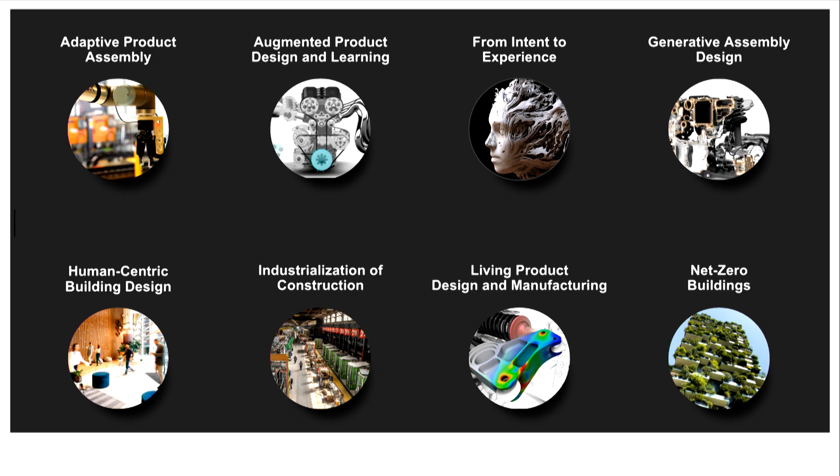Autodesk is a 3D design company here in the Bay Area, and today I'm representing Autodesk Research. This is a really awesome organization. We have a ton of different research themes across our industries. A lot of you might know us for architecture, engineering, and construction, manufacturing, media, and entertainment. But if it's news to you today, we also actually have a lot of robotics research that has gone on for the past 10 years.

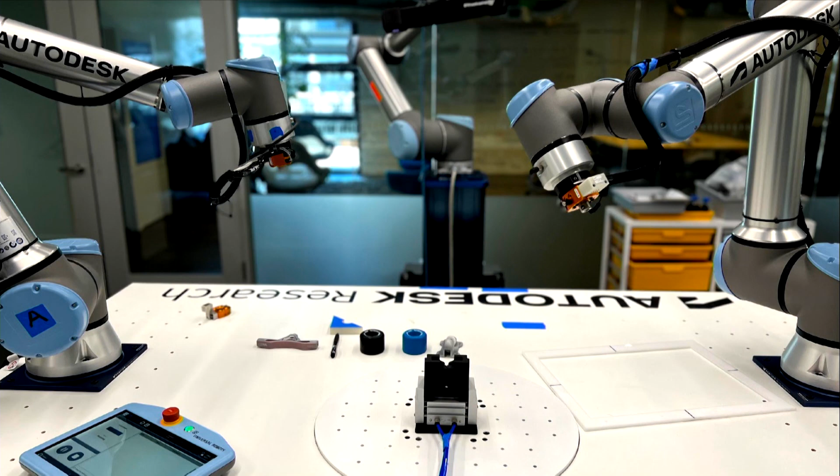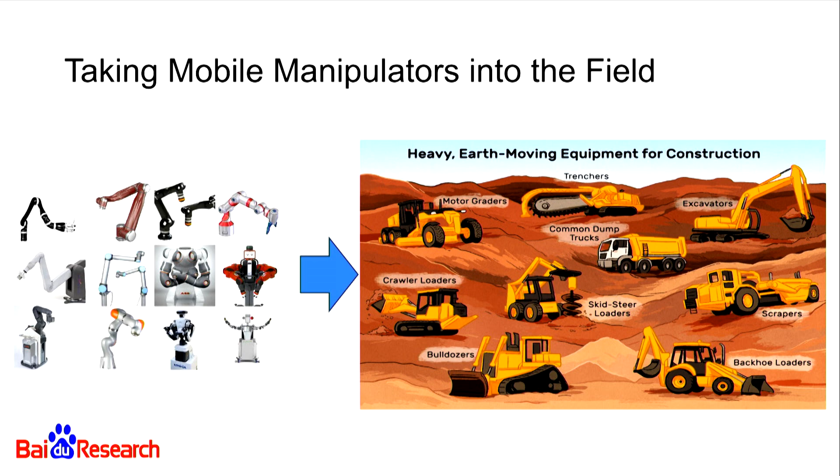We work on construction machinery automation, such as excavators, which can be thought of as mobile manipulators but working in the field. Our research motivation is that operating an excavator is very challenging because the worker needs to work in a very harsh environment, and there's also a shortage of skilled operators.

Towards this goal, we have developed an autonomous excavator system, AES, for construction earth moving, collaborating with top construction companies. This video highlights the performance of our AES system, which can perform multiple construction moving tasks, such as truck loading, autonomous truck loading. As you can see, there's no operator inside the cabin for this excavator. Other tasks include navigation in complex terrains and trenching of the terrain.

Our system incorporates perception, planning, and control. There's a lot of research challenges behind construction robotics because robots need to work in unstructured environments, and we are looking for collaboration. Thank you.

Using intelligent robotic systems to automate everything from the inside of the warehouse to the consumer's front door. Today we have three next-generation robotic fulfillment centers powered by fleets of intelligent mobile manipulator robots that reliably pick, pack, and handle thousands of customer orders every day.

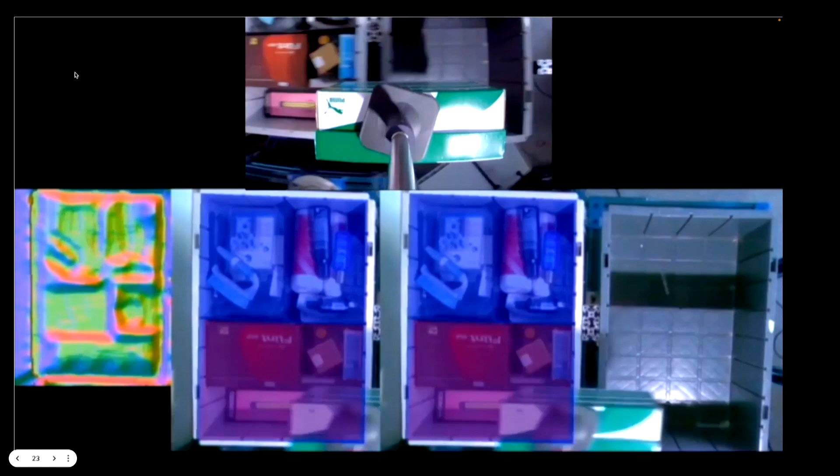Our RL policy learns how to most effectively coordinate dozens or hundreds of robots to fulfill thousands of complex orders by efficiently navigating through the warehouse and collaborating with other robots to store and retrieve inventory and pick, pack, and sort orders. On the vision side, in this video, we show our robot's ability to handle a diverse set of products, everything from footwear to apparel, electronics, cosmetics, brushes, loofahs, etc.

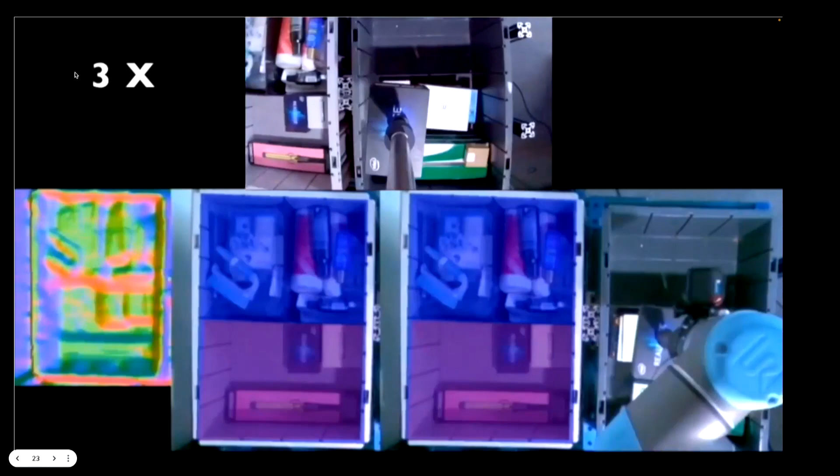What we're showing in this video is our robot's ability to determine regions on each of the objects where it can place its gripper to reliably pick the object up. We're also segmenting and separating out the different objects in the scene to determine material properties about each one, like whether it's big, small, rigid, compliant, or porous like a sponge. We use all of that information to determine how the robot should handle the item and what type of gripper it should use.

So you can also see we're densely packing and playing this game of 3D Tetris in real time. There are three things that make our picking system reliable across millions of different objects.

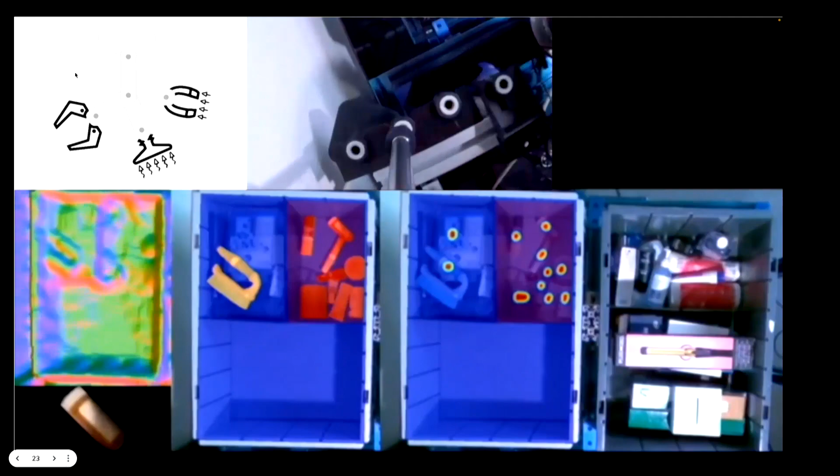The first is the Nimble brain, the AI system we've developed in-house. The second is the Swiss Army knife gripper, our robot's ability to swap out different types of tools and grippers to reliably handle many different objects. The final piece is the teleoperator in the loop, which helps the robot if it ever gets stuck, and is also used as a means of collecting more training data for behavioral cloning.

Quickly, I'll highlight Nimble's iconic AI board of directors: Fei-Fei Li, Marc Raibert, founder of Boston Dynamics, and Sebastian Thrun, founder of Google X and Waymo.

Good morning. We propose automatic waypoint extraction, or AWE, to scale imitation learning to long horizon tasks. AWE is a simple plug-and-play module that automatically breaks demonstration trajectories into waypoints without human supervision. Then you train your policy to predict the next waypoint instead of the next immediate action. AWE decreases policy horizon by up to 10x, and thus reduces compounding errors.

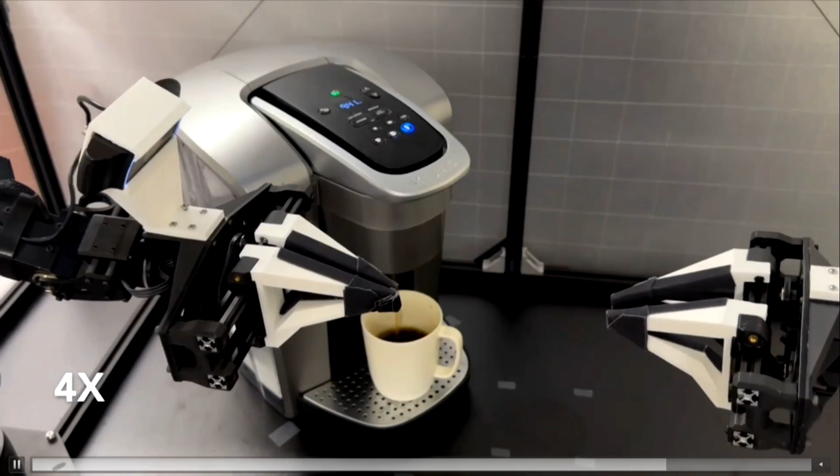ALL can be combined with state-of-the-art imitation learning methods, such as ACT and diffusion policy. It consistently improves the performance and data efficiency on previous benchmarked and real robot tasks. Come chat with us if you're interested in long-horizon decision-making. Thank you.

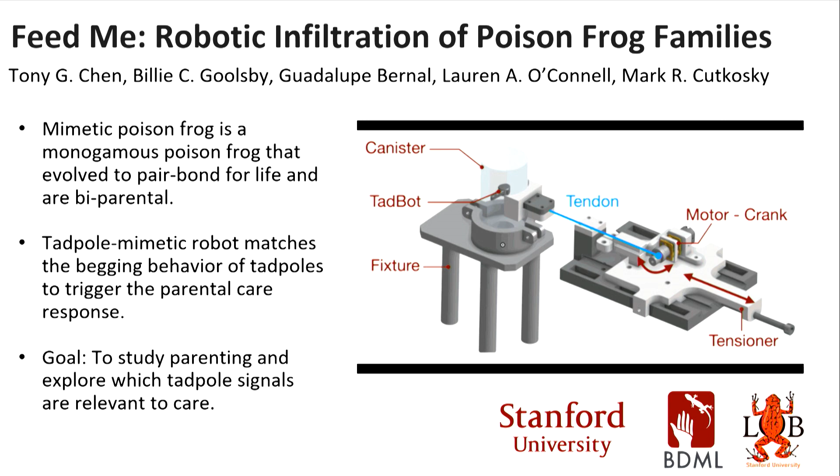The key idea is that we would like to use commercial drones, which are widely available, cheap and simple systems, as thrust modules to attach to a generic object to transport it and fly it around. The insight is that the attachment locations around the objects are very important synthesis parameters that we can leverage.

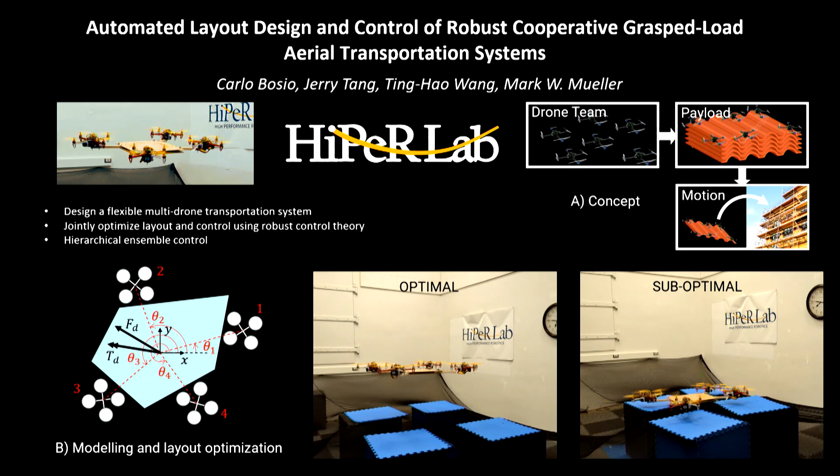Hi everyone, I'm Sophie Leanza, and my project involves a soft robotic arm that can mimic the multimodal deformations of elephant trunks. Elephant trunks can achieve a wide range of different deformations due to the contraction of their differently oriented muscle fibers, such as longitudinal or helically arranged muscles. We're using an artificial muscle that contracts upon heating, called liquid crystal elastomer, and we achieve multimodal deformations by heating these materials through a simplified, rationally designed muscle arrangement.

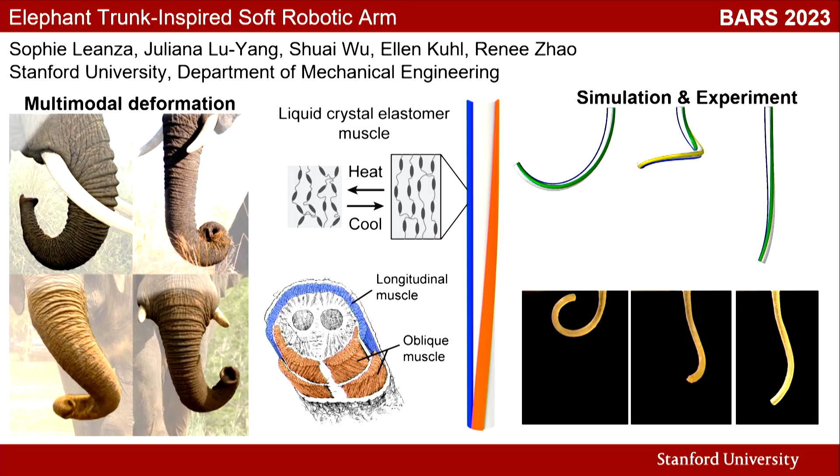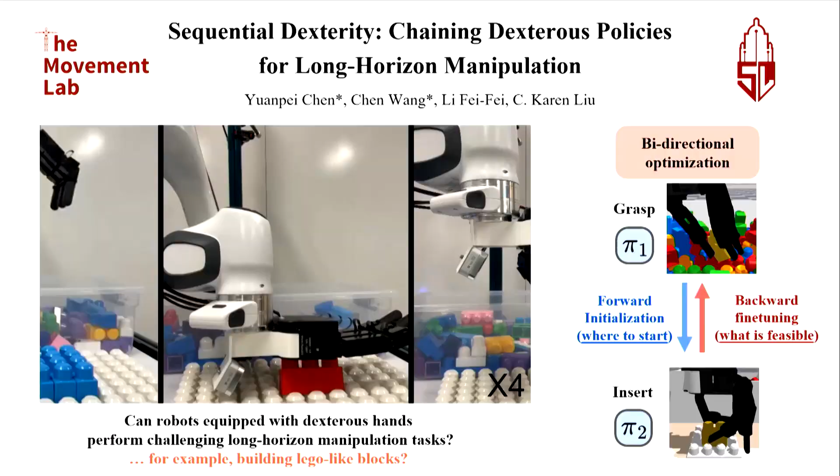Hey everyone. How can we enable a robot equipped with a dexterous hand to perform challenging long horizon manipulation tasks, for example building a structure from a pile of mega blocks? In this work, we present Sequential Dexterity, a general system based on deep reinforcement learning that chains multiple dexterous policies to achieve a long horizon task goal.

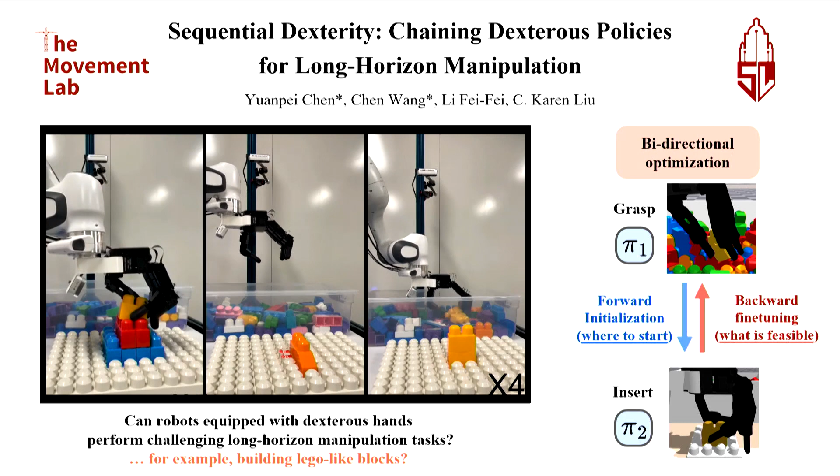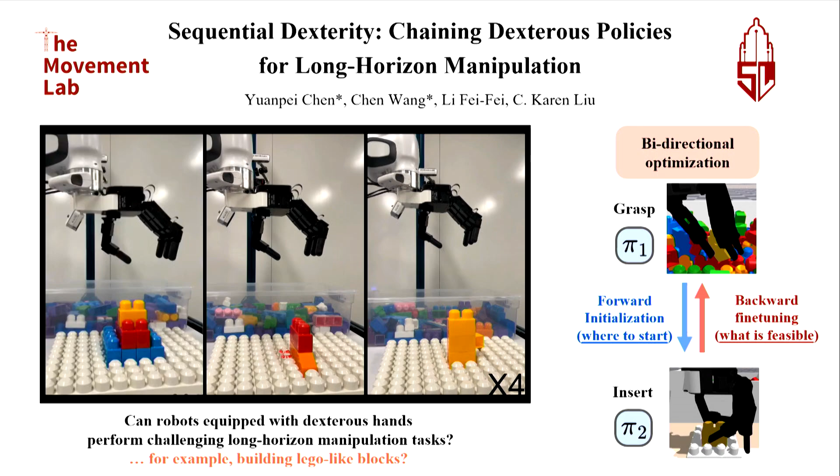The core of our system is a bidirectional optimization framework, which progressively fine-tunes the sub-policies to enhance the chaining success rate. The key is to guarantee that the end-state distribution of the previous skill is feasible for the next skill to start with. For more details, feel free to check out our poster and our website. Thanks.

Hello, I'm Claire, and our project AO-Grasp, Articulated Object Grasp Generation, focuses on the first crucial but challenging step of interacting with any articulated object: determining how a robot should grasp it to enable downstream interaction. AO-Grasp predicts stable and actionable grasps on objects like cabinets and appliances, given only partial point clouds. We train it on a new synthetic dataset of grasps on articulated objects.

Despite being trained only on this synthetic dataset, AO-Grasp proposes actionable grasps on real-world objects with varied geometries and articulation axes, in both open and closed states. Please stop by our poster to learn more. Thank you.

Hello everyone, I'm Won Kyung Do from Stanford University, advised by Monroe Kennedy. This project is about inter-finger small object manipulation using the DenseTact optical tactile sensor. The goal of this project is grasping, reorienting, and classifying small objects out of a cluttered environment using our soft optical tactile sensor input.

We successfully achieved an 88% successful grasping rate as well as successful classification results for grasping small objects out of the cluttered environment. If you want to check more details about our project, please come by our poster, and thank you.

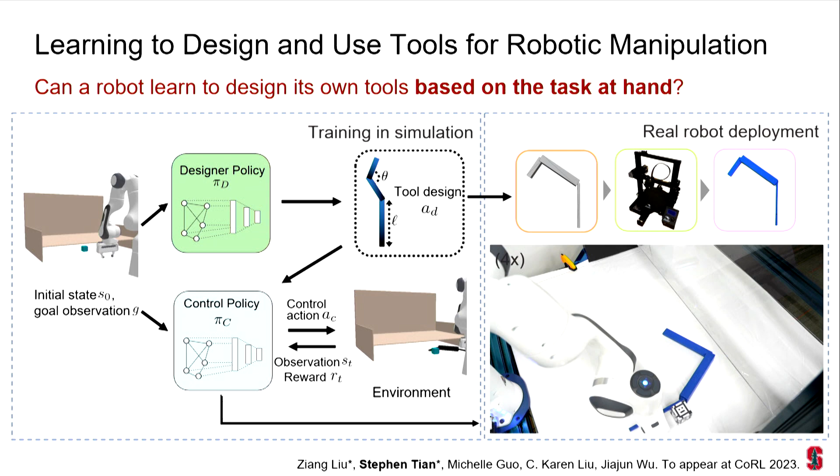It turns out to be harder than it looks, because the design of a tool and how you use it are highly interdependent. So we develop a deep RL framework for robots to jointly learn to design and use tools for manipulation, creating specialized tools based on the task initialization or goal. We develop a set of evaluation environments, a simple tool design parameterization, and evaluate our policies on real robots by creating the tools in the real world using 3D printing.

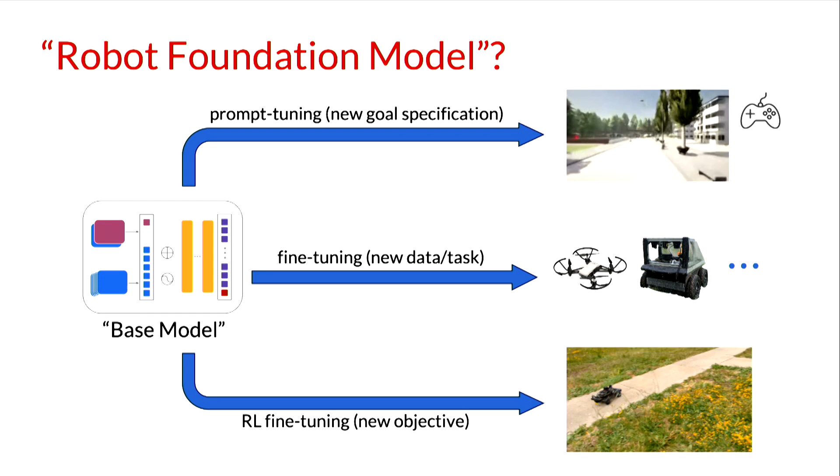To this end, we try to train a cross-robot model, which can be fine-tuned using new data for new tasks, like new robots. It can be used by prompt tuning for new goal specifications, and by fine-tuning with different objectives, like reinforcement learning. And the code is public.

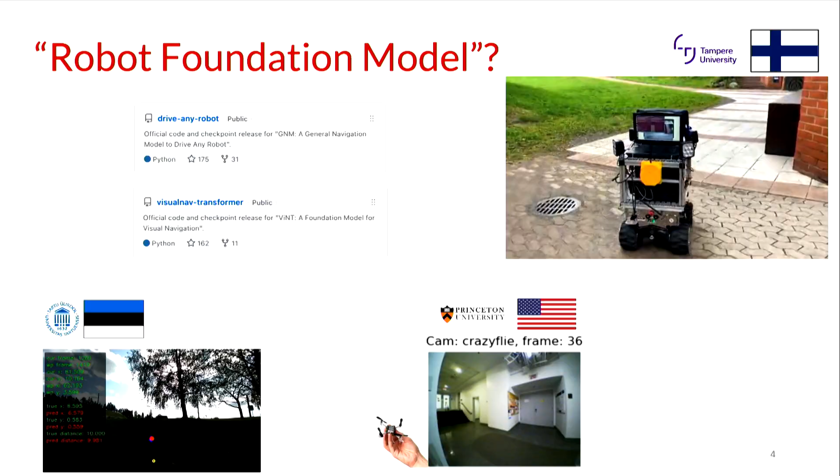Hi, I'm Yu Chen. I believe future robots will need to learn from non-expert human teachers. Therefore, it is important to harness the right kind of information from such interactions. For example, non-expert human teachers can provide noisy demonstrations that harm downstream imitation learning.

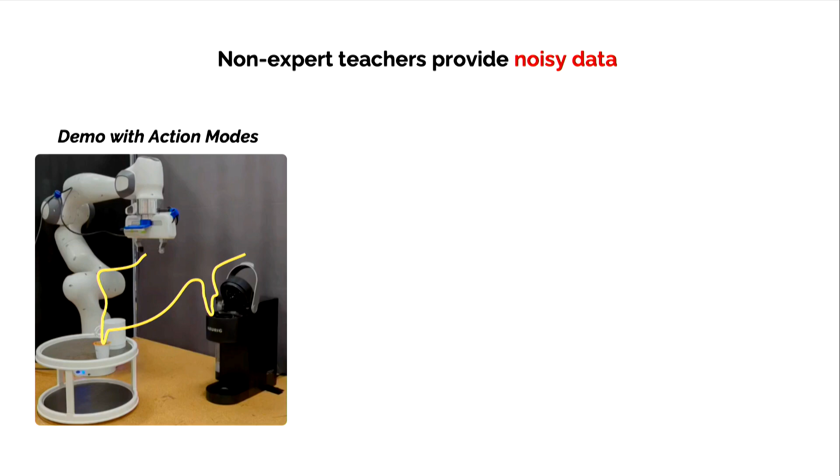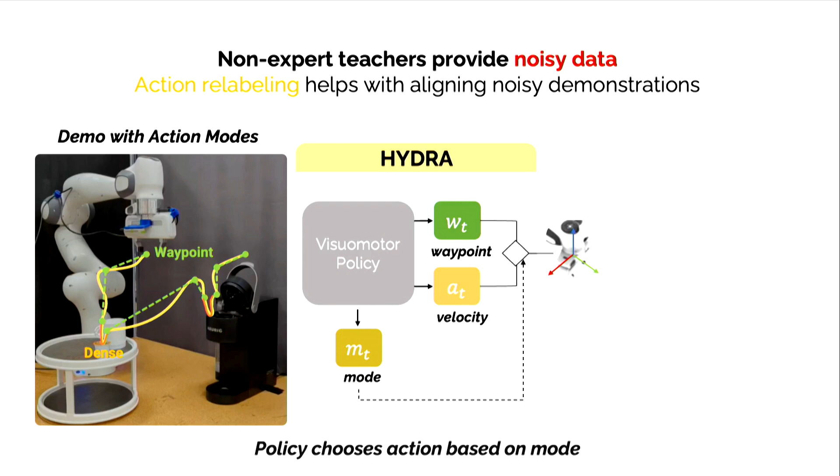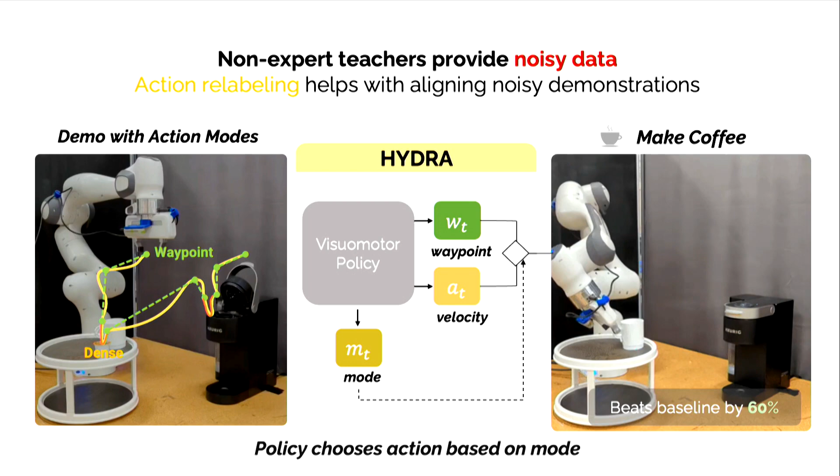In this work, we show that if we collect additional annotations of action modes, we can leverage action relabeling to train policies with hybrid action representations, so that simply doing imitation learning without any reward signals can also learn from suboptimal data. We show that our method can beat baselines by 60% at this challenging long horizon precise manipulation coffee-making task. This work will appear at CoRL next month. Thanks.

Hi, my name is Ron, and I'm a PhD student in the Autonomous Systems Lab, advised by Professor Marco Pavone at Stanford. Our goal is to build reliable autonomous systems that safely leverage learned components.

In this work, we ask: how can we avoid closed-loop failures when faced with out-of-distribution observations at deployment? Observations that are dissimilar from training data, on which learned models can behave very erratically, and that will suddenly come up during deployment.

We thought it might be very difficult to robustify a perception system to anything it can possibly encounter at deployment. At the very least, we may try to detect such examples at runtime and use such an OOD detector to trigger a safety-preserving fallback strategy. If you are interested in building robust autonomous systems, please come see me at my poster.

Hi everyone, my name is Joe. I'm advised by Mac Schwager. Today I'll be talking at the poster session about guaranteeing robot system performance using stochastic simulation rollouts.

This addresses a problem where a lot of our dynamics models these days are wrapped up in very complicated simulators where we don't have the actual equations exposed to us, which makes traditional analysis of performance very challenging. So we resort to a distribution-free statistics approach where we can certify different measures of risk and different chance constraints.

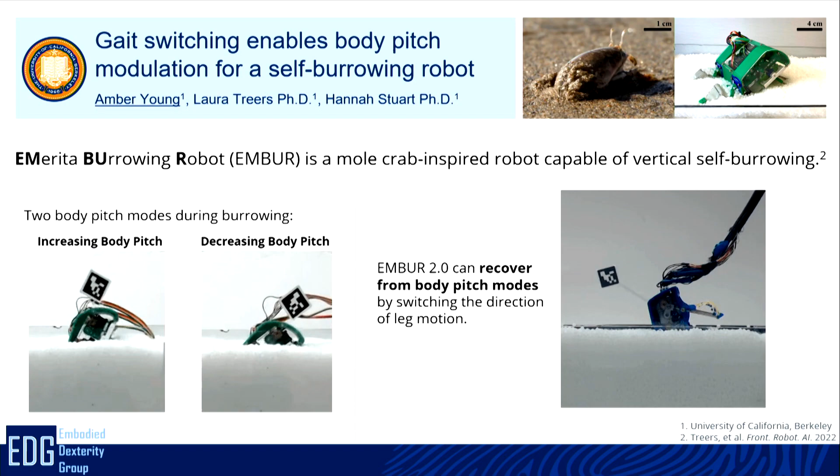Burrowing on granular media is a very challenging task for robots due to upward resistive forces from the granular media. However, it's a very easy task for the Pacific mole crab, which can burrow very fast as it's avoiding predators. My predecessor, Laura Treers, designed the EMBUR burrowing robot inspired by the Pacific mole crab, one of the first legged robots capable of vertical self-burrowing. However, we noticed there were two failure modes as it would burrow, described by its changing body pitch. So we designed a second version of the robot, EMBUR 2.0, capable of body pitch control. To learn how that happens and to meet the robots, come check out my poster. Thanks.

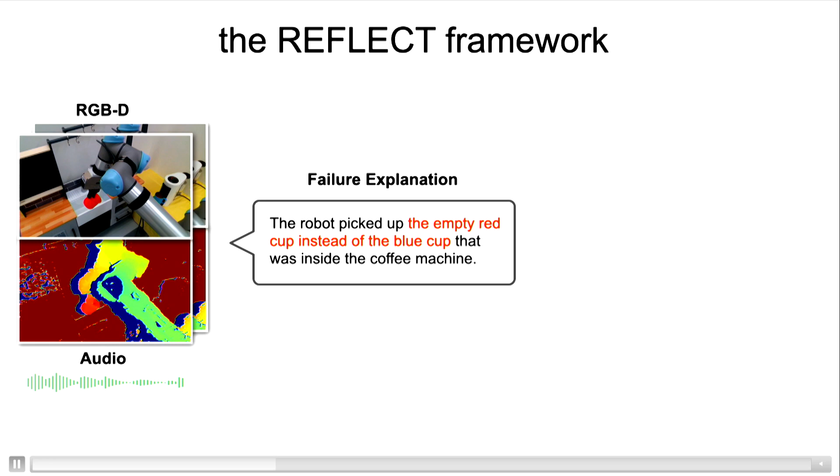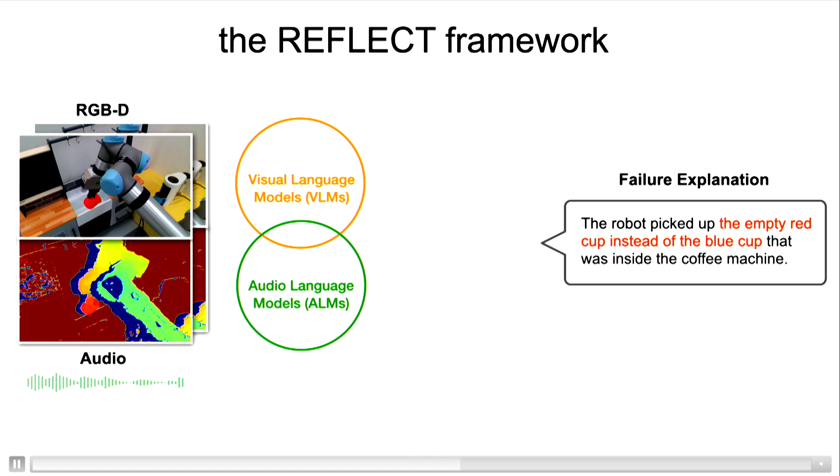We present Reflect, a general framework for both human and robot to better understand failures. The framework takes in multi-sensory observations from the robot task execution and outputs a natural language failure explanation, which either helps a human debug the failure or helps the robot generate a correction plan. Our approach uses pre-trained VLMs and ALMs to convert raw sensory data into a textual summary of the robot's past experiences, which is then used to query an LLM for failure explanations. By leveraging the common sense reasoning ability of LLMs, our framework makes no explicit assumptions on tasks or failure types. To learn more, please visit Zeyi at the poster session. Thank you.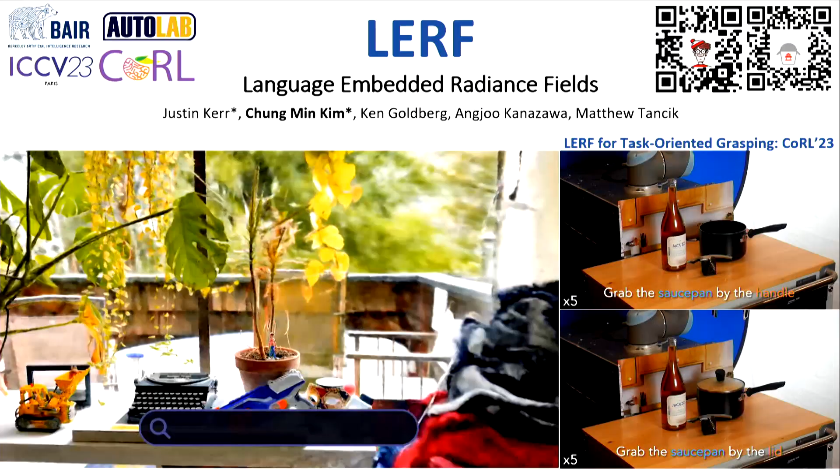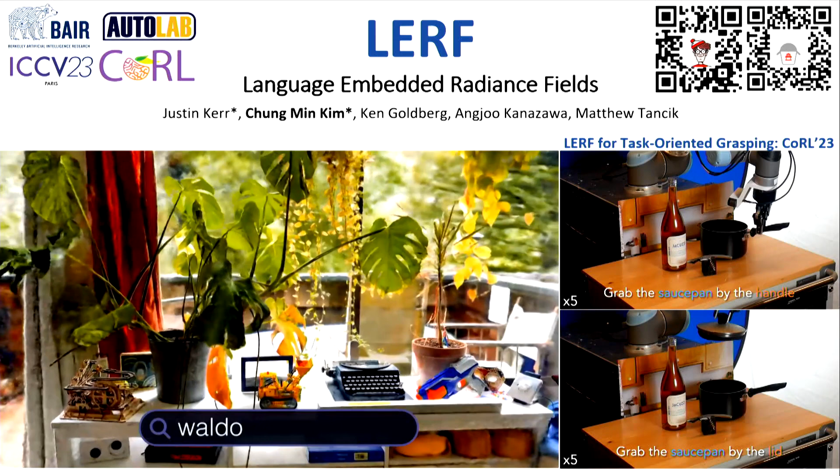Hello, I'm Chung Min from Berkeley's AutoLab, presenting LERF, Language Embedded Radiance Fields, and our follow-up paper using LERF for task-oriented grasping. LERF embeds CLIP features volumetrically into 3D, resulting in a 3D scene representation which can be queried with natural language. It has a multi-scale understanding of the world, which can be used for querying large objects as well as their parts. We leverage this property for task-oriented grasping. Given object and part queries specified by natural language, the robot queries LERF to generate semantically meaningful grasps. Please come to our posters or scan the QR code to find more. Thank you.

Hello, my name is Ahad Rauf, and my research is on smart skins for soft robots.

Traditionally, soft actuators and sensors are made on elastomeric materials like silicone, but soft manufacturing processes often have issues scaling to make large actuator and sensor arrays. My research is on auxetic and kirigami form factors for flexible printed circuit boards, embedding electrostatic layer jamming and capacitive sensing for scalable, low cost, and high resolution, localized stiffness control, and distributed sensing.

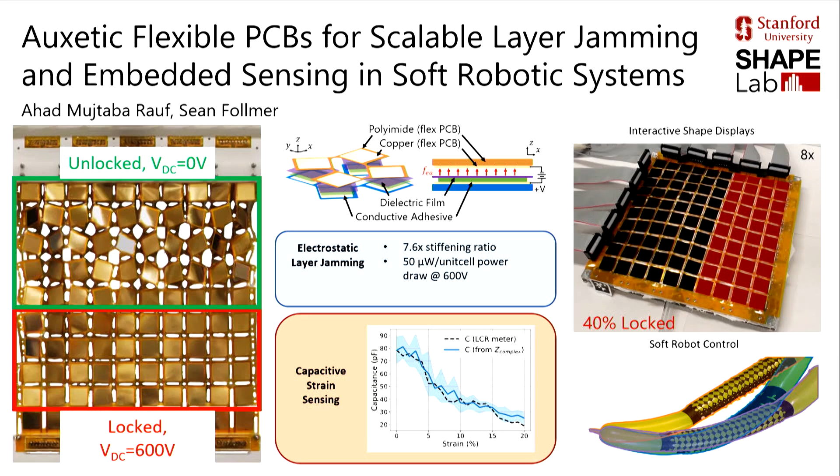I'd love to chat with you at my poster session about our applications in haptic user interfaces in soft robotics. And I also have more fidget toys. Thank you.

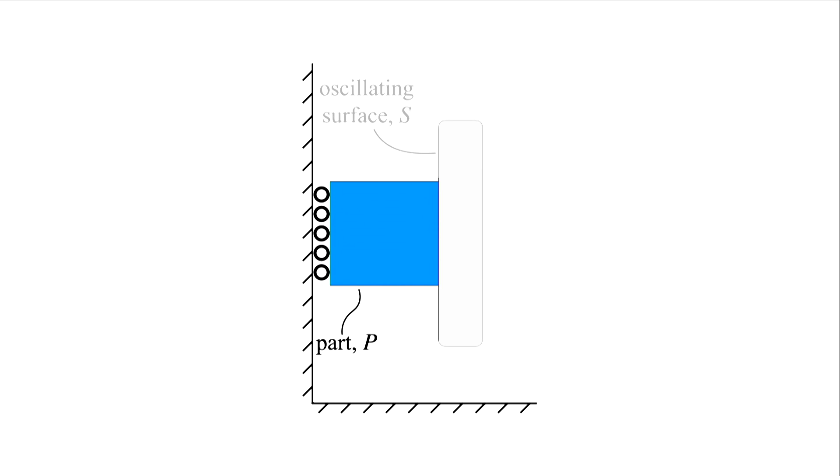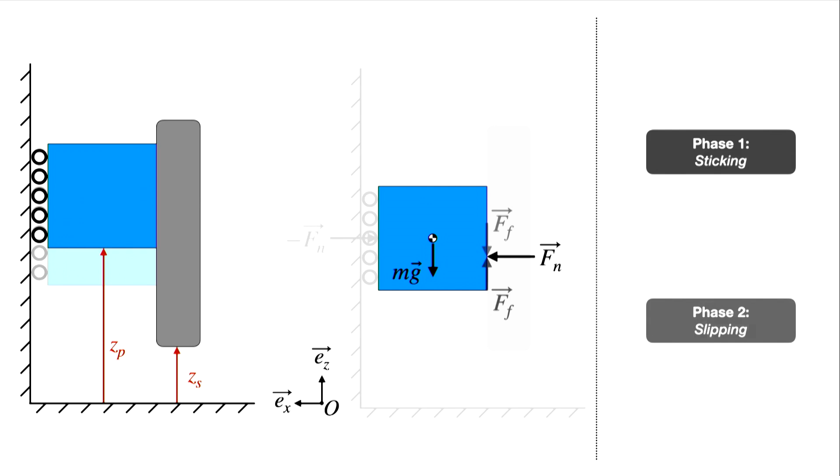Hey everyone, I'm Connor. So what we did is we took a simple vibrating surface and used that to transport parts vertically against gravity. We did that using alternating sticking and slipping phases, sticking up with the object then slipping below it, effectively catching it at a lower position. We repeated this over and over again to move that part upward.

To test this theory, we built a parallel jaw gripper that can transport a bunch of different parts with different masses, friction coefficients, and also different contact types. So we had plane contact, line contact, and point contact as well.

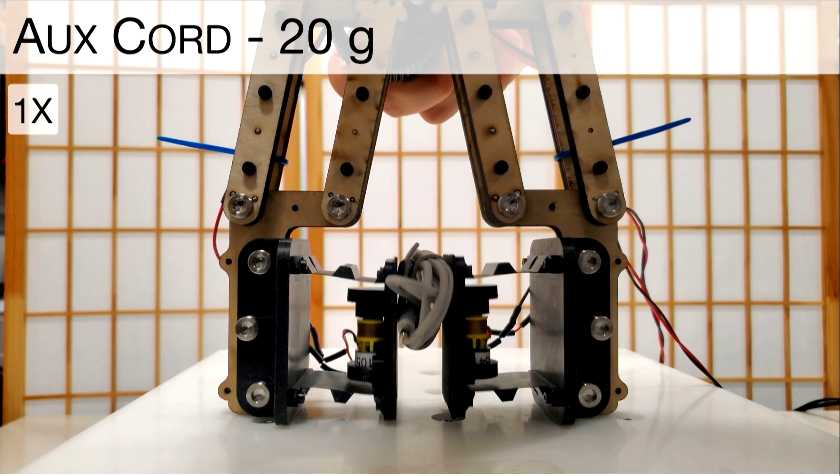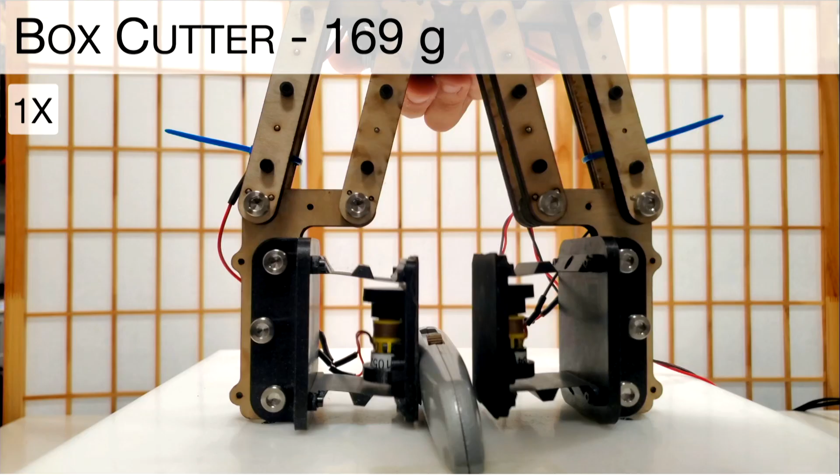To verify our dynamic model, we also built a test bed. I pointed my phone through a microscope and collected some motion tracking data, and that verified the dynamic model we were using. If you want to come learn more and play around with the device a little bit...

I didn't bring it to turn it on because it's really loud, but if you want to play around with it passively, I'll have that at my poster. Thank you.

Hello everyone, my name is Himadri Basu and I am presenting today the trajectory planning problem of a multi-agent system in space applications. The objective of a formation reconfiguration problem is to find a fuel optimal final configuration and thruster commands that allow the agents to move from one formation to the other while avoiding any collisions along the way.

The challenges are that the target assignment problem is coupled within the trajectory optimization framework, giving rise to exponential time complexity because of the mixed integer linear programming formulation. The second issue is the non-convexity of collision avoidance constraints.

We present two approaches in our work where we decouple this assignment problem from the optimization algorithm, and these two approaches differ from one another on how collision avoidance constraints are formulated. In the first approach, we find a feasible path to a fuel optimal final configuration. In the second approach, we find a feasible final configuration with optimal paths towards the terminal locations.

In our current work, we are additionally considering the presence of external obstacles and developing a reinforcement learning based maneuvering policy to avoid such obstacles. Thank you, come check out my poster.

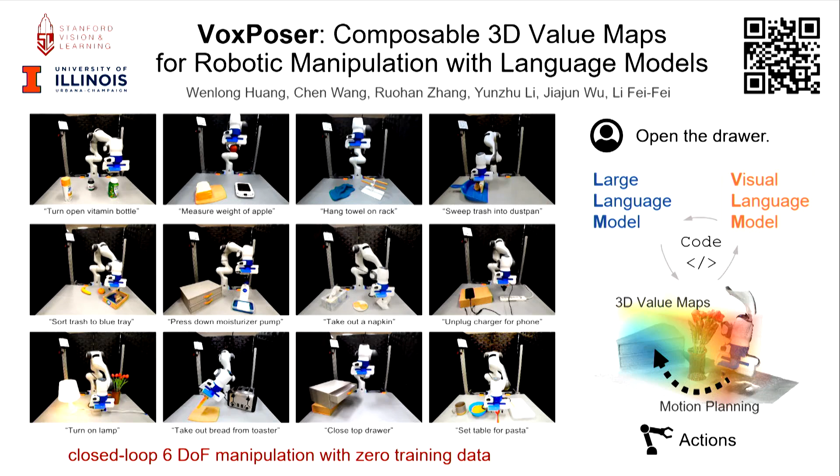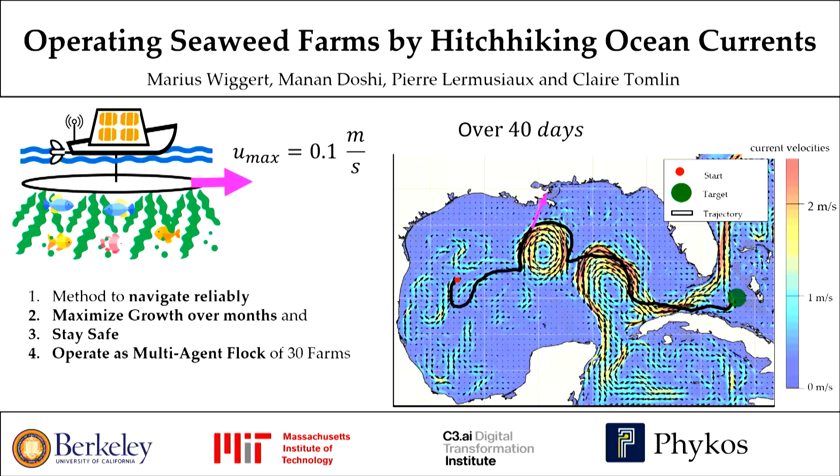We developed various methods combining dynamic programming and machine learning to navigate them reliably despite high forecast errors, to maximize growth over months even though forecasts are only 5 days out, to stay safe, and to operate them as multi-agent flocks. Come by to chat about it.

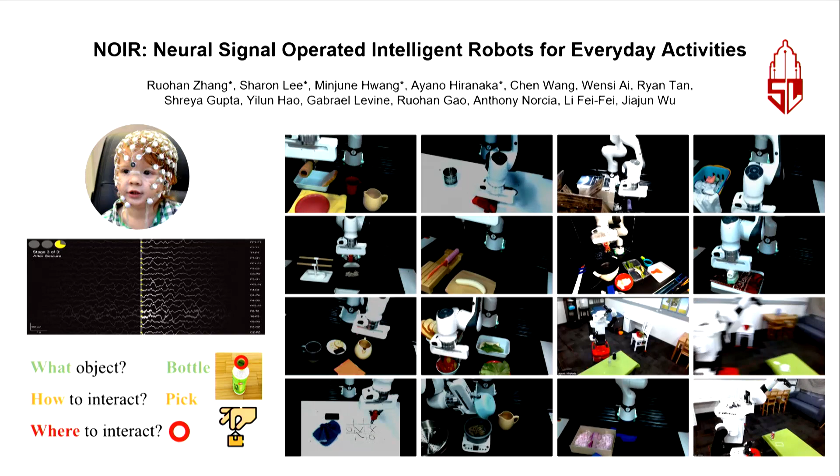Hello everyone, my name is Ruohan Zhang. It's my great pleasure to introduce you to NOIR, neural signal-operated intelligent robots for everyday activities. NOIR is a brain-robot interface, a new system that allows humans to directly control robots using their brain signals.

In particular, we use a non-invasive EEG device to record human brain activities, use that to infer human intention, and pass that intention to our robots. We show on the right here that with NOIR, robots can assist humans in challenging long-horizon daily activities, such as cooking, cleaning, playing tic-tac-toe with your friends, and even petting your robot dog.

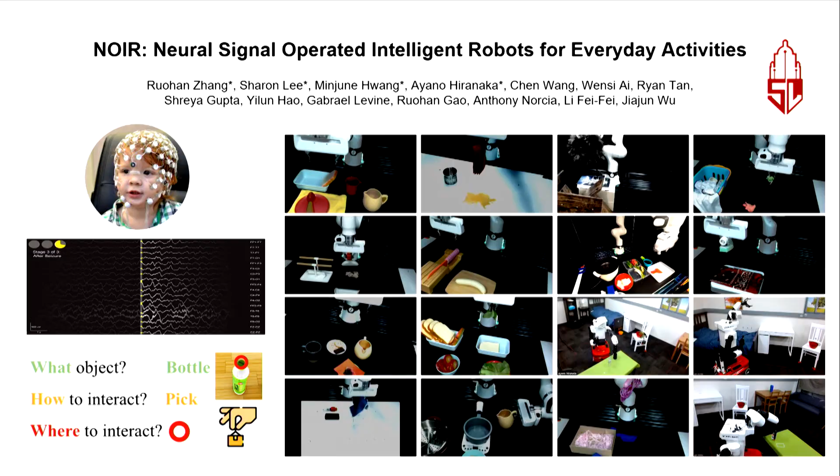And if you're interested, please come see us at our poster. Thank you very much.